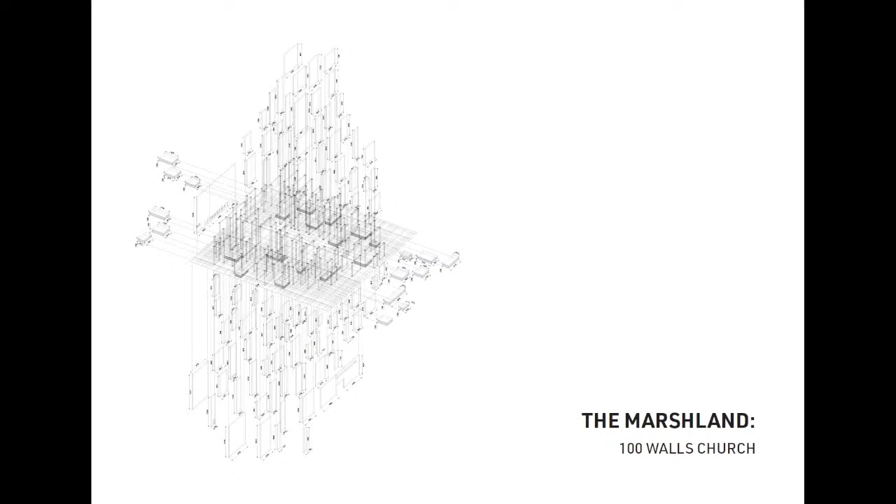And we were asked by the clients to design a church in a relatively weird condition. This church was going to be in a mall. And that might be very strange, but we got to know that religion is a very integral part of culture in the Philippines. So finding chapels or churches in malls is not that uncommon.

Our situation was that it was the first time we were faced with that challenge. So we started looking at the island, and we discovered that it had beautiful mangroves, obviously the trading, but also amazing beaches, very protected actually, and also the famous cross that the Portuguese conqueror Magallanes left. So with all these factors, we went a bit deeper and started to look at the site itself.

Our site was in a marshland, in a piece of reclaimed land that was relatively close to the Cebu Historic Center, but also to the Mactan International Airport and other cities of the area. So our site itself was quite empty, but it was not going to be like that for a very long time.

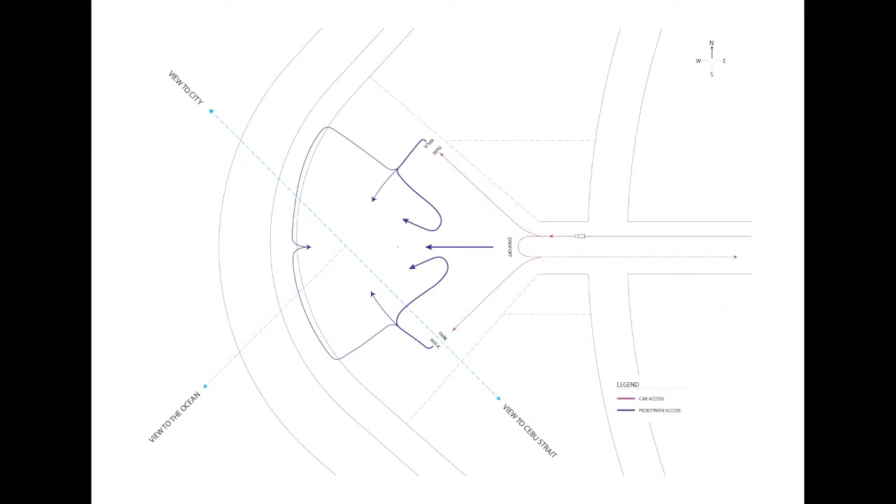They told us a bit about how they wanted the flow of cars and pedestrians. We started to study a bit more the views toward the Cebu Strait, the views towards the historic area, and also towards the ocean. But we didn't have that much to go on, because this was how it looked like. It was very new reclaimed land. And we thought, well, if this church is going to be a

chapel or a church inside a mall, it has to be different. We have to use a different kind of measure. And that's when we decided to take the pew as our unit. And with that pew, we created, or it determined, the grid of the site. And that grid in turn helped us organize the program.

And later on, we decided, well, if we are using that grid and that pew as our unit of measure, why not making it our unit of measure for the structure itself? Why not, instead of the more hierarchical traditional Catholic Church, create a church that is much more democratic, where people can go and wander and get lost? And that's how the walls started to appear.

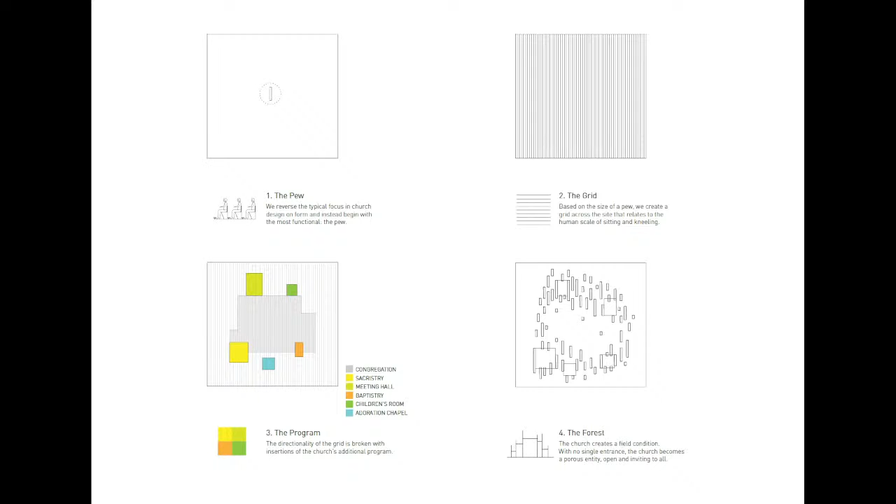It also had, to be fair, a kind of budget constraint reason. We had, I think, $900,000 to design this building that was going to be for more than 1,000 people. It was also going to be...

The timeline was extremely limited. We only had, I think, 7 months from the beginning of the project till it was built, because a Vatican delegation was going to come on a very specific date to consecrate the church. This church is actually not called the 100 Walls Church, it's called San Pedro Calungsod. He's the saint of Cebu. So it had to be that day, it had to open that day, and we couldn't wait.

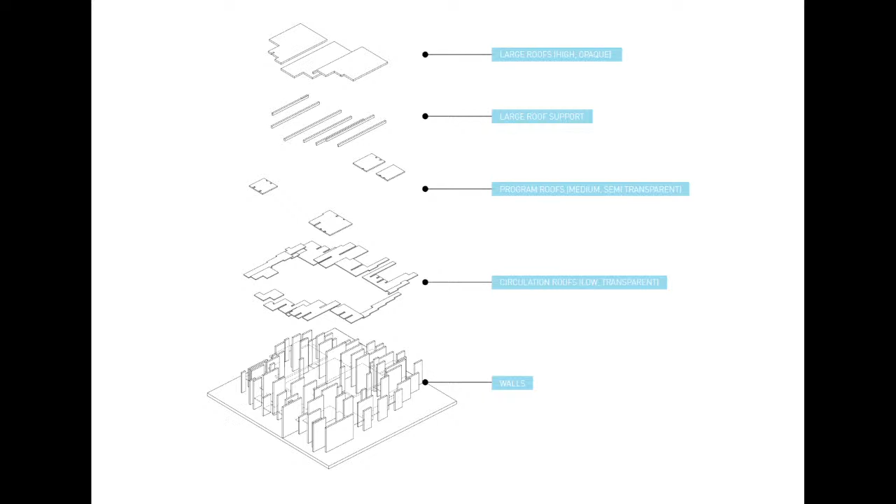So doing the walls in concrete solved two problems. They were structural, but they would also become a kind of enclosure. And they would help us build what we kept referring to as the forest of walls. There would be corners, spaces where people could just get lost and pray without having to go to the congregation hall. Before getting to this scheme, we studied very deeply the Gothic church, the neoclassical church, and saw how those flows work.

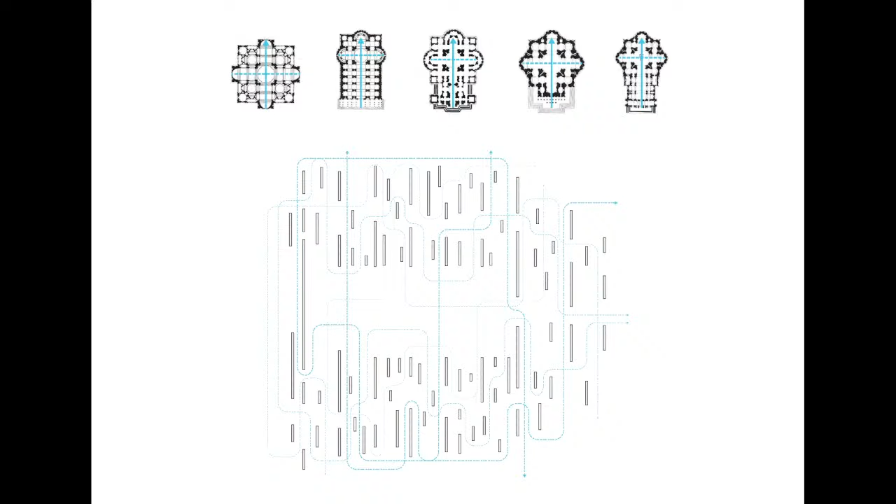But surprisingly, and we actually didn't tell this to the clients, we also got inspiration from mosques, because in the mosque it's a more democratic space where there's not such a division of hierarchy. And we wanted to bring that into this project so that people could wander through and use the public space however they wanted.

So together with that forest of walls and this idea of openness outside the congregation hall, we also wanted to bring the concept of the sunken gardens. The sunken gardens, or the idea of the garden, the orchard, has a deep meaning in the Bible. There are very specific moments in the Bible where the garden plays a very important role. One of the most inspirational for us was actually when Jesus goes to the olive orchard and he has doubts if his destiny is actually dying.

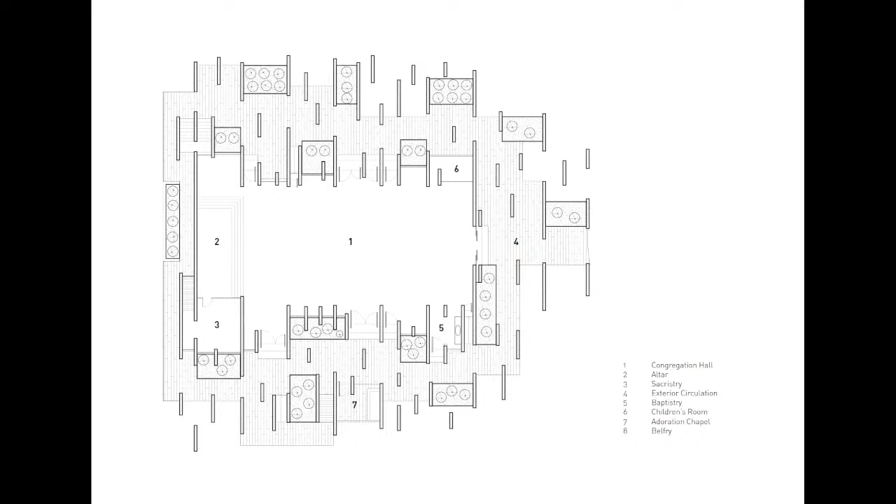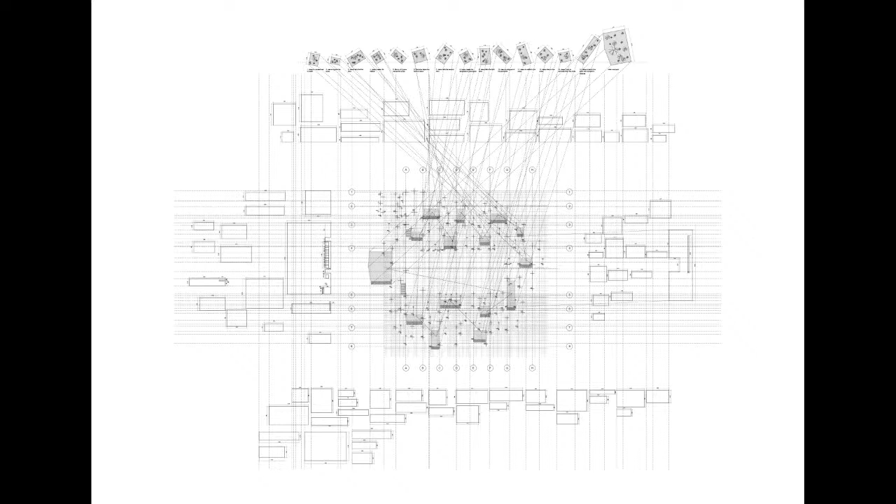So we wanted to bring that self-reflection and connection to spirituality into our building, so people can move around these walls no matter what time of day, even if there's no mass in the congregation hall. Those gardens ended up being paired with passages of the Bible. This drawing looks very complex, but all the gardens are connected to that quote. They follow a specific path or flow, and have a specific relationship with the hierarchy of walls. The walls sometimes go higher in those gardens so people feel more protected and can have a more intimate prayer.

So the building got built, and it was crazy. They ended up doing 24-hour shifts. If you go to Google Street View right now, a lot of it is built. When they consecrated this church, I think a million people went to the celebration, and they extended into all these adjacent lots to listen to the group of priests that came from the Vatican to consecrate this church.

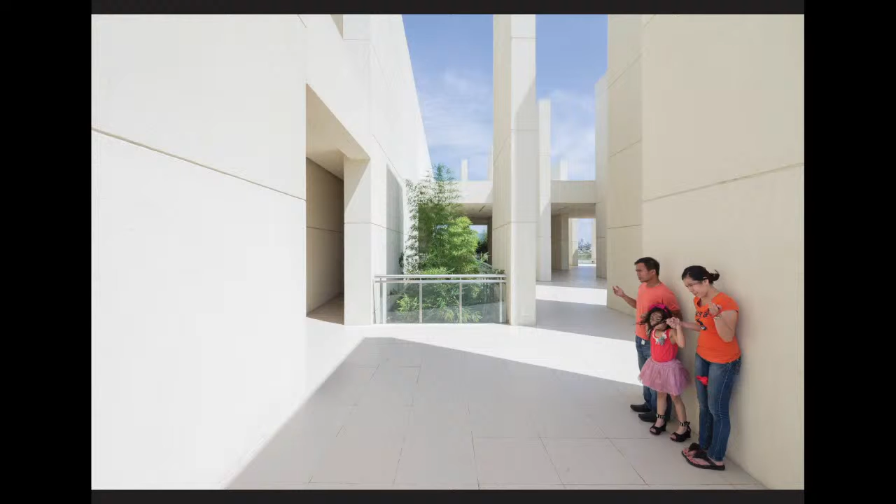We have seen images of families praying outside very often. Sometimes they feel more comfortable doing it outside, or more private, and it works really well for them because they can go there during lunch break if they're working in the mall, things like that. We've been lucky enough that the children's band of the area comes to practice here. They practice outside because they really like the bit more intimacy in these pockets, in this forest of walls.

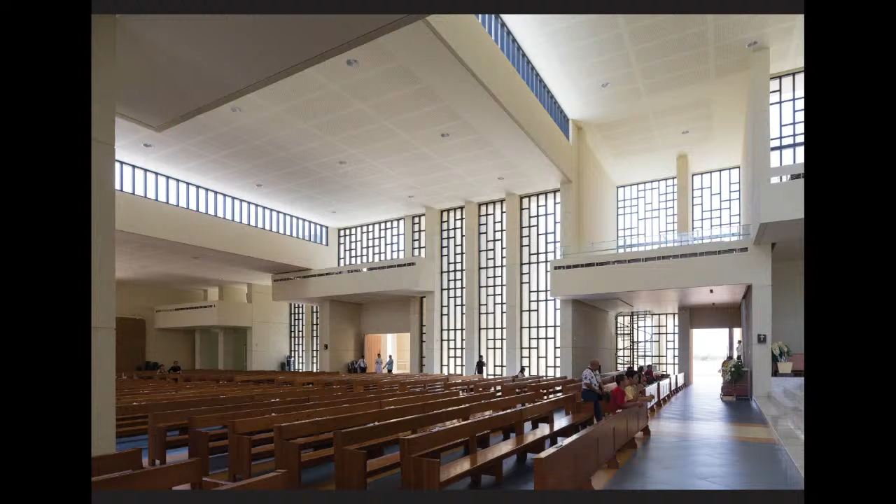This is also the celebration of the Mass, and you can see all those multiple doors that I was mentioning before. Normally they also leave all of them open because it works really well for cross ventilation. We try to have as little use of air conditioning as possible because it's not a rich congregation, so they cannot afford to have the air conditioning running all the time. Again, another factor that influenced the design.

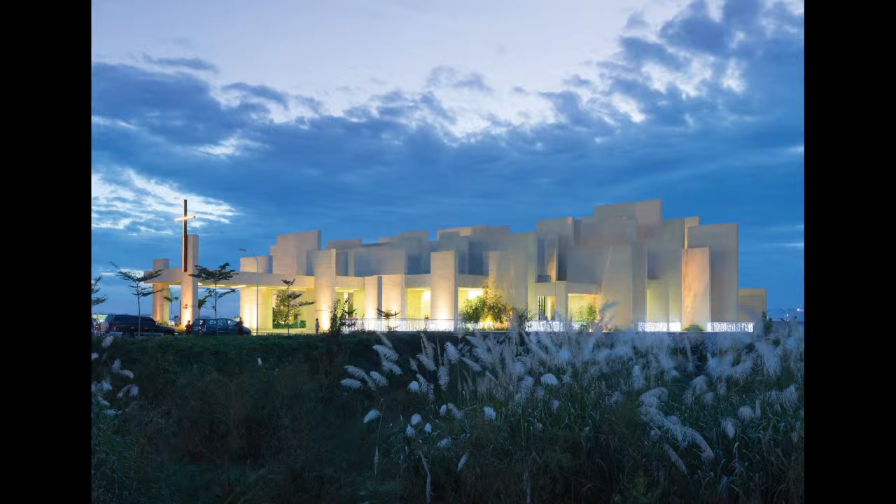Surprisingly, we did this church, and the La Salle Order really liked it and contacted us to do another church, which we didn't expect. This is a different one. I have called it the lake, the Santuario de la Salle, because it's really close to the Taal Lake.

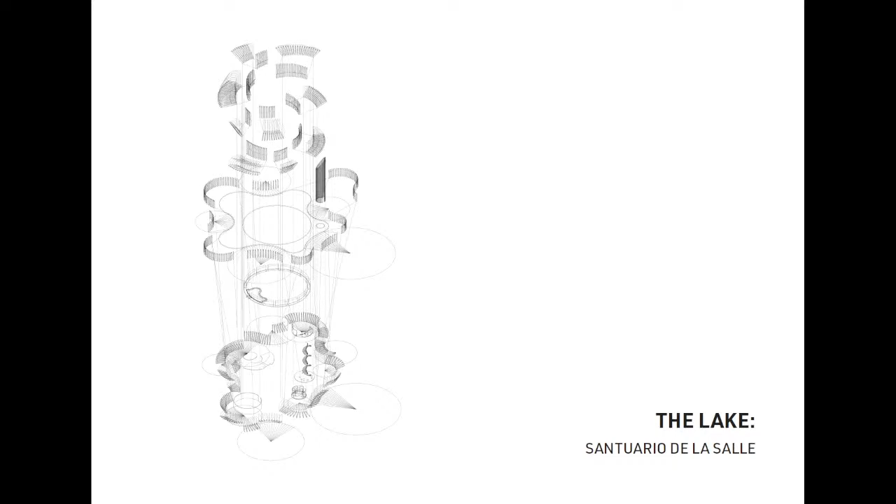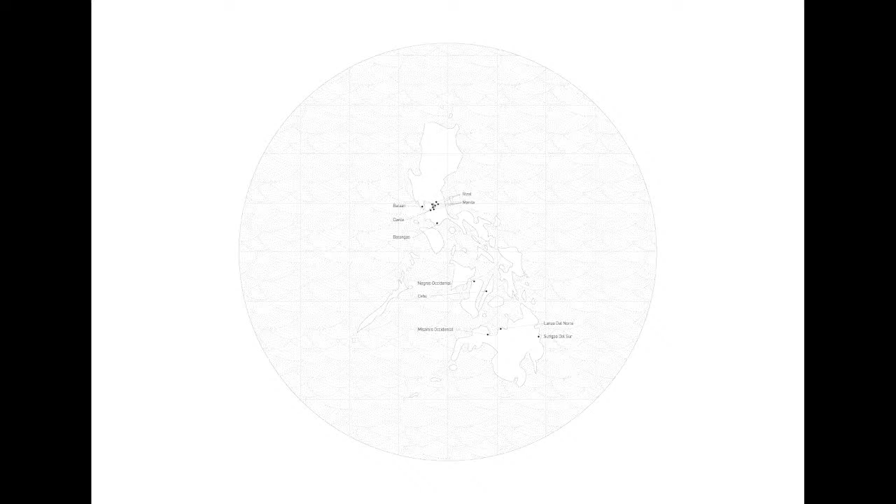The Taal Lake is a very massive crater close to Manila that became a lake as thousands of years passed by, and we were asked by them to do this church. We didn't have much information when they contacted us because this church was going to be in a relatively peculiar location. It was going to be in a campus, but the campus had not been built at all. It was going to be their new technological campus, and the first building they were going to do was basically the church.

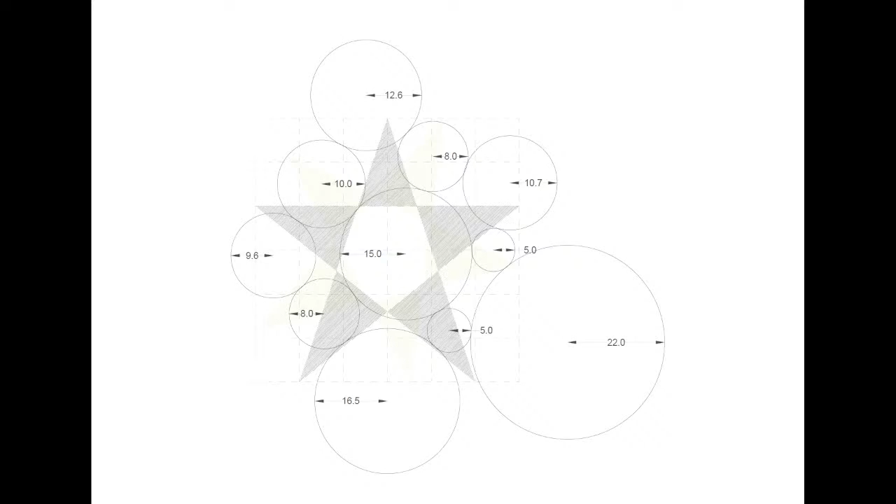So we didn't have even a map at that point, and we said, well, we don't have much to go with, so let's start and look at the star. The star is the symbol of La Salle, and maybe that would help us understand a bit more how we can organize the program.

We started thinking, well, if this is going to be a church for students, it cannot be a place that is super enclosed. It has to be open, it has to be welcoming, because it's going to be used for much more than masses. It's going to be for student groups. Also, sometimes from what we have heard, they meet there as unions. So it's a place that has multiple lives, many more than we expected.

Thinking about this, we felt, well, let's design a space that is kind of amorphous, that doesn't have a very clear axis or orientation, because the client also didn't know if they were going to orient the building that way or rotate it. They didn't know yet because they didn't know how the whole master plan of the campus was going to work. So, inspired by the ambulatory space that you can find in Gothic churches, which is that corridor that goes behind the altar and all around the axis of the church, we took that and we wrapped the congregation hall and introduced program, other kinds of rooms, the baptistry, the adoration chapel.

This is again a very large church. It is for 1,200 people, just the congregation space. So we had to be careful about that. And also, again, we had a very limited budget.

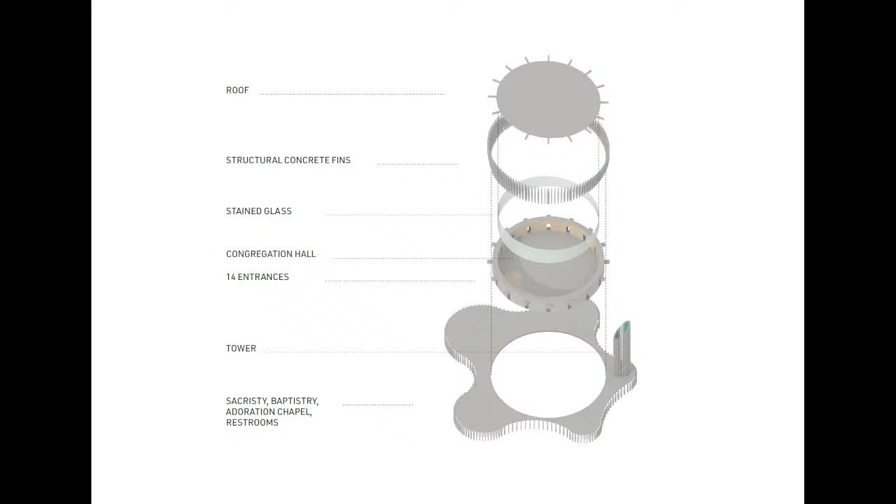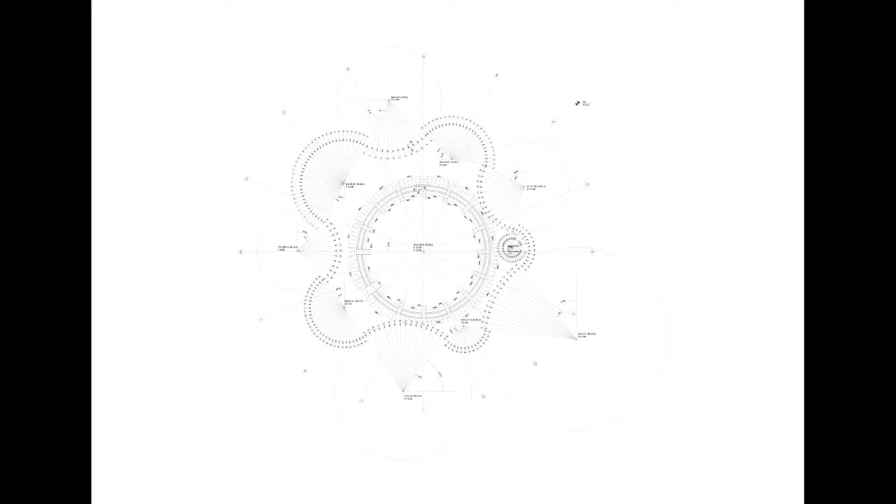And yeah, this is the floor plan. We worked a lot with the radius and the rhythm of the fins to make them big enough for the cranes and the wheelchairs and the thousands of students that will come, but also close enough in certain areas to provide privacy. This building just got built this year. We started in 2014, and it got built 10 years after because it took them a very, very long time to raise the $700,000. It was very difficult for them.

The clients were very excited about the project, and they decided that this church was going to be a pilgrimage church, which means there's now an arm, a relic of Saint La Salle, in the church. That brought a series of constraints into the building—it had to be consecrated before the relic arrived, so we had to finish construction very fast.

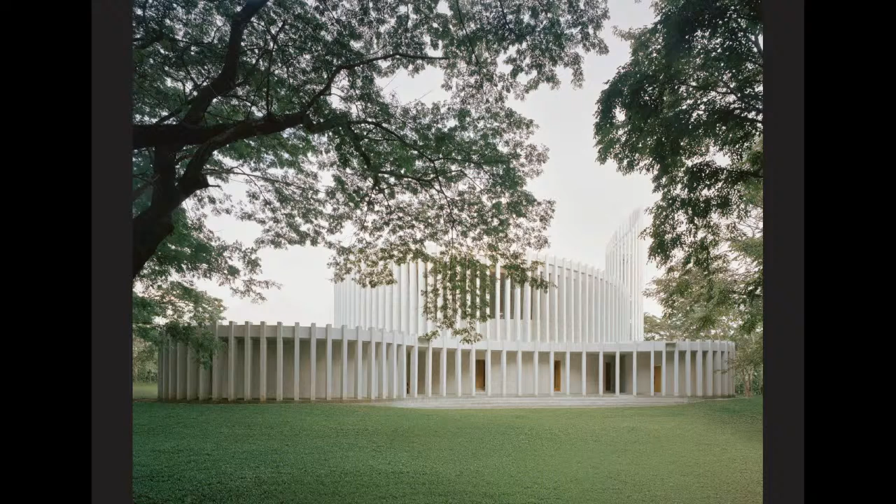We can modify the geometry to accentuate certain aspects, but in the end it's going to be a very simple structure. This is one of the entrances, and that modulation of the rhythm of the fins is more evident here—you can see it's more open towards the congregation hall and more closed towards the sides where we have the sacristy and the adoration chapel.

A view from the corner. We also got a lot of inspiration from the surrounding trees, because at the beginning that was the only thing we knew about the site. The clients didn't give us a site plan or topography map until we started construction. And here's a view of the tower from farther away, from a big access point towards the campus.

Some details of how the structure would work—we were using concrete ring beams to keep the structure very thin but still resilient, because this project also has to be resilient to typhoons, flooding, and, in this case, not earthquakes, but intense typhoons.

And the view from the inside. Right now a lot of students come into this space and just hang out, because it feels a bit more private, but you still have the connection to nature and the forest that surrounds you—so it's more special and more relaxed than other areas of campus.

You can walk all around the surrounding space of the congregation hall, but there are areas that are a bit more tight, and those spaces are like that because they're more private and we want to control the flow of people. That's the access to the bell tower—we designed a spiral staircase that can also be accessed by the public.

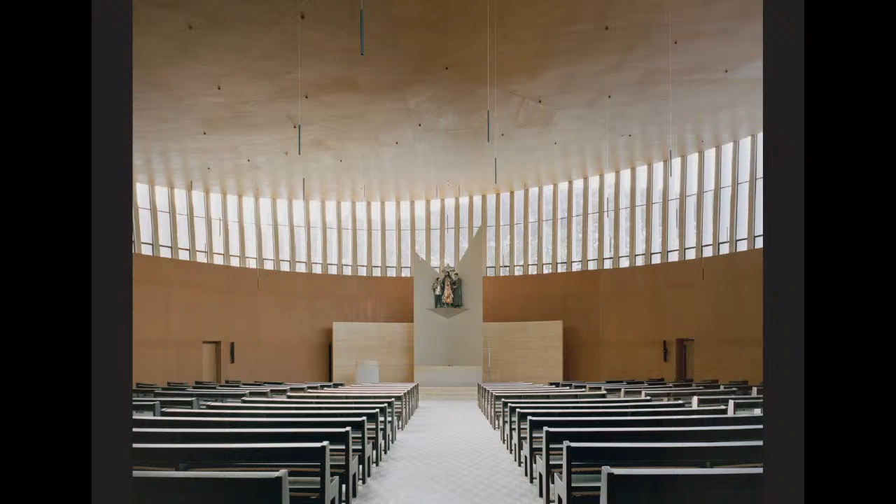Our intention initially was not to use benches. We wanted a space with individual chairs where all the students could move around and not follow this strict organization. But unfortunately, when it became a pilgrimage church, there were a lot of constraints, and this was one of them—we had to use benches instead.

The most delicate materials were also reserved for this space. For the congregation hall, we have wood and marble, so it feels more special, more sacred, and different from the outside—in the end, more unique.

I imagine you've noticed the floor and this crazy pattern we have—this is inspired by the ceramic patterns that the local community makes, always a mix of two colors, black and white or red and white. In this case we did our own interpretation, designed our own tile, and made it in dark green and white. The dark green is because it's the color of La Salle.

And for the sacristy, we use a slightly different color, a pink orange color. This is also a very special private room where the priest meets with students, or now couples that want to get married and things like that. So we also used finishes that were a bit more delicate.

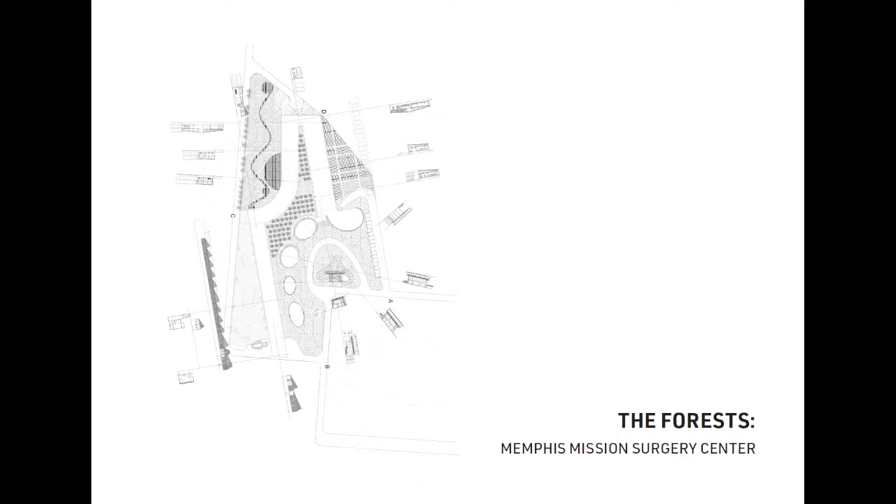So we have done a lot of churches in a way, but we have also done other kinds of projects that had to face the many challenges of climate change I was talking about before. This one I call the forest, the Memphis Mission Surgery Center. It's in an area of the Philippines called Negros, very close to Cebu, the very first project I showed, in central Visayas.

As you can see in the graphics here, there hasn't been much change in life expectancy, but there has been extreme growth in the last decades. Unfortunately, they don't have good healthcare. There are very few hospitals, and also very few schools. So the clients contacted us, two doctors from Houston, although originally from the Philippines, and told us they want to build the first trauma center in Negros, and a project that would be the beginning of a hospital complex.

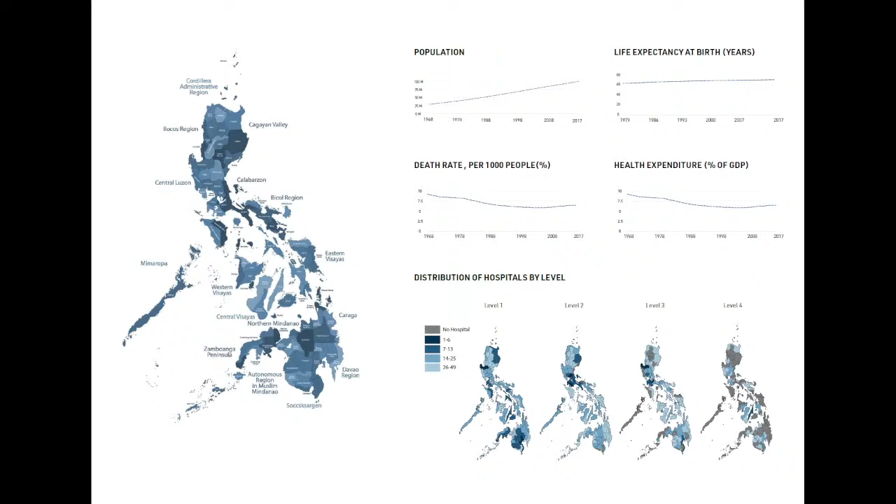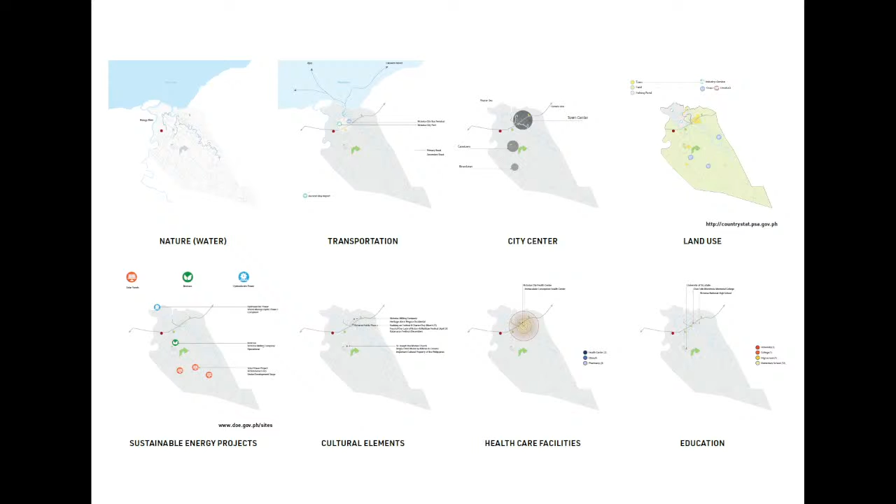They gave us a lot of freedom to design the project, in the sense that we had to follow the constraints of the trauma center, but could include other aspects that would complete the project and were not necessarily connected to healthcare. In order to do that, we had to study the region in depth: the energy, the education level, the proximity to transportation hubs, to cities.

We discovered that this is an area that has been traditionally very agricultural. It still is. They depend a lot on sugarcane and coconut farms. They have beautiful forests, including coconut tree forests, but also other things. They have a lot of industry to manufacture and transform the sugarcane. They have vernacular architecture, and a famous painting called the Angry Christ, an angry Jesus in one of their churches.

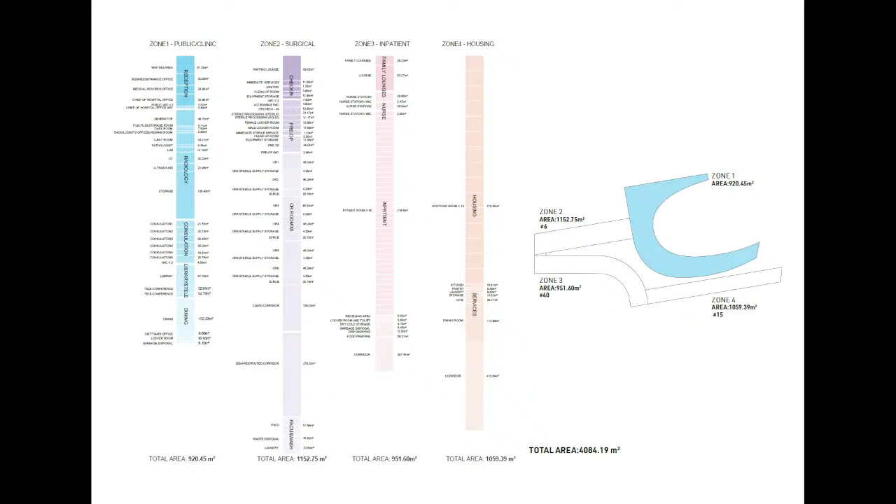So we thought, let's bring the beautiful landscapes of the island and the industrial past and present, and make a project that combines both worlds. That's how we got to the program. Besides being a hospital, we really wanted to give back to the community some kind of education hub, because there's nothing in this area - it's extremely agricultural. And we thought that bringing art would also make a lot of sense.

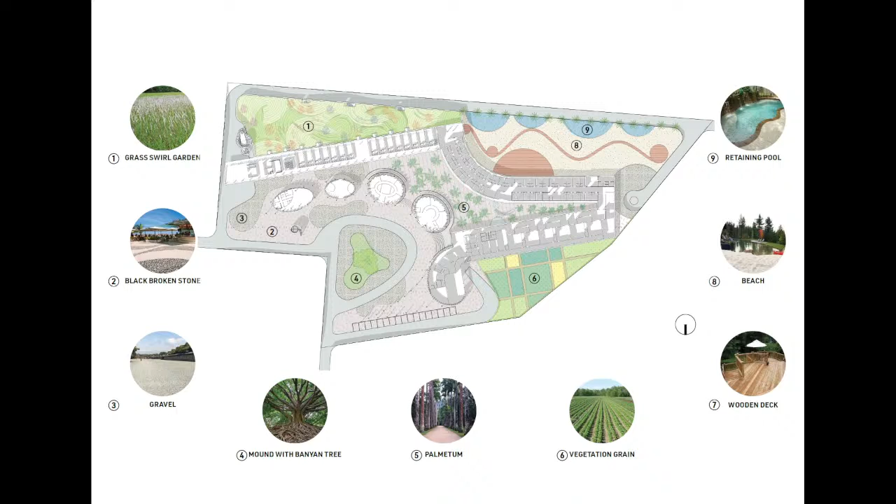So we created this kind of crazy shape with a large public plaza at the entrance, consultation offices - those bubbles around it - residences for doctors on one side, and then the trauma center itself. We surrounded all of this with multiple ecosystems or landscapes found on the island, so the transition would not be as harsh.

So the idea is that this hospital would also attract foreign doctors who would come to provide expertise unknown in the area. They would spend one or two years living here, showing the community and our doctors how they do their work, and that way the community would grow.

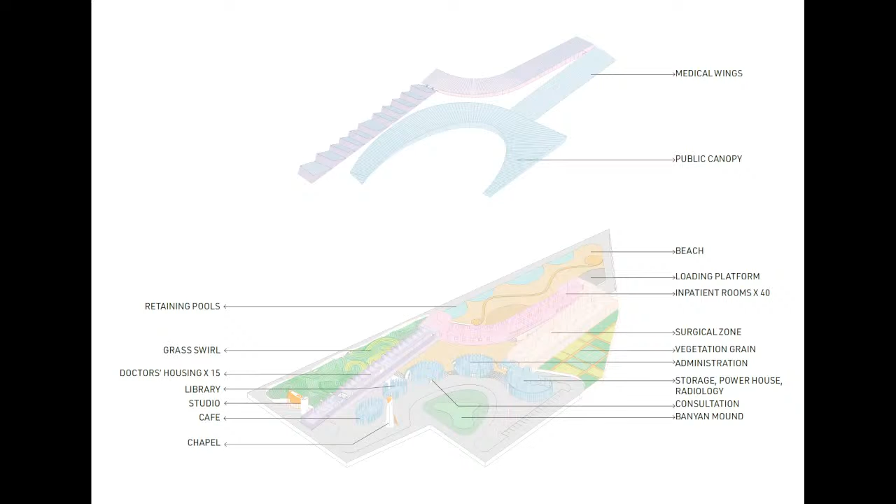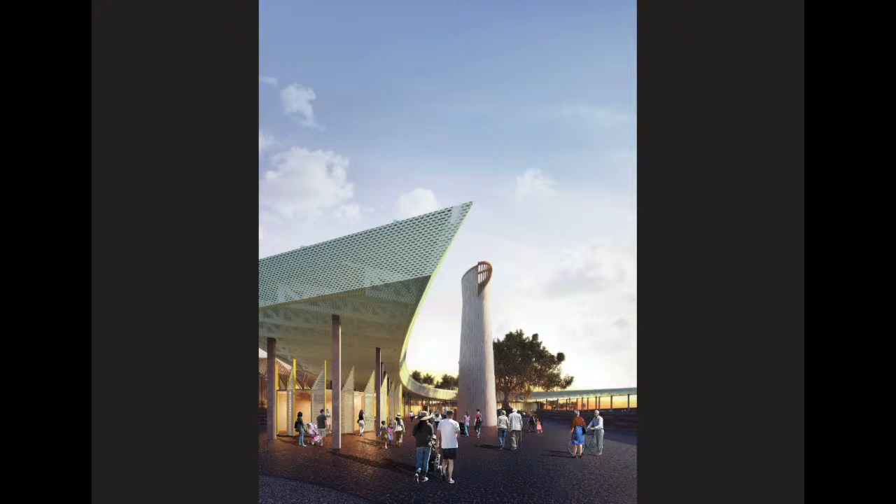This would really be the first phase of a bigger healthcare educational complex. These were all the elements we took into account. We have the chapel, which would not only be for visitors but also for the community - it's much smaller than the churches I showed you before, mostly a space where people can briefly go to meditate or be there if they feel oppressed. We also had the consultation area, which are all those bubbles around the main zone.

We imagine a big staircase that would open to the public, but also it would act as a way of making the entrance to the hospital a bit less traumatic.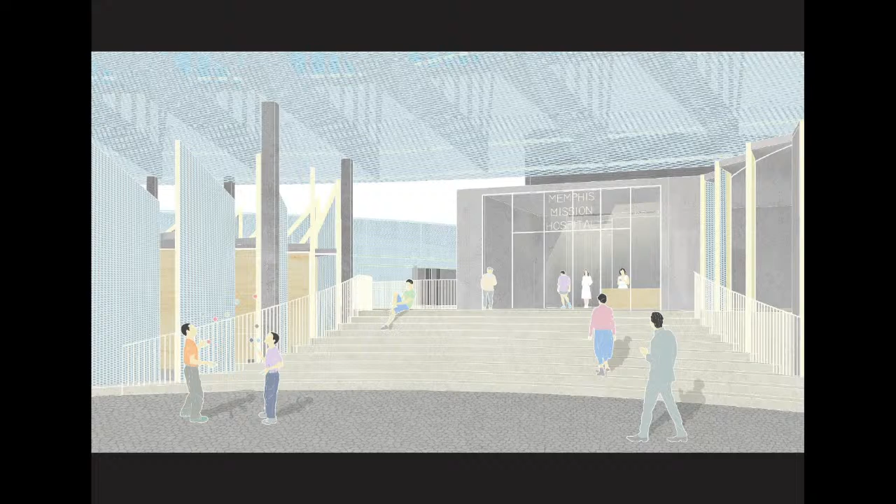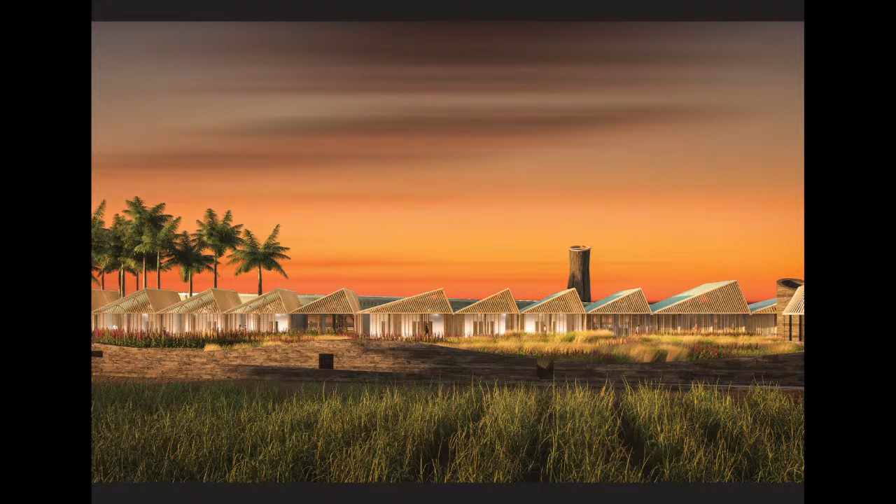We have the medical area. We brought some of those coconut palm trees here too, so it would make the process a bit less traumatic. We had the rooms. There would be 14 patient rooms that would face the sand dunes and the water, which is also a kind of landscape that you can find in Negros. And we try to use light colors for the corridors and more vibrant palettes for the rooms. We have the residencies for the doctors, and again those would face the grasslands of Negros, and they would be more open towards the outside.

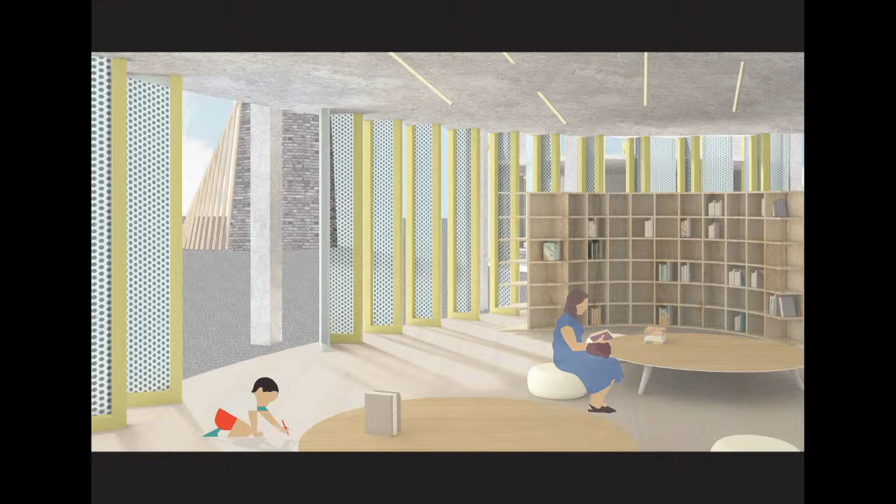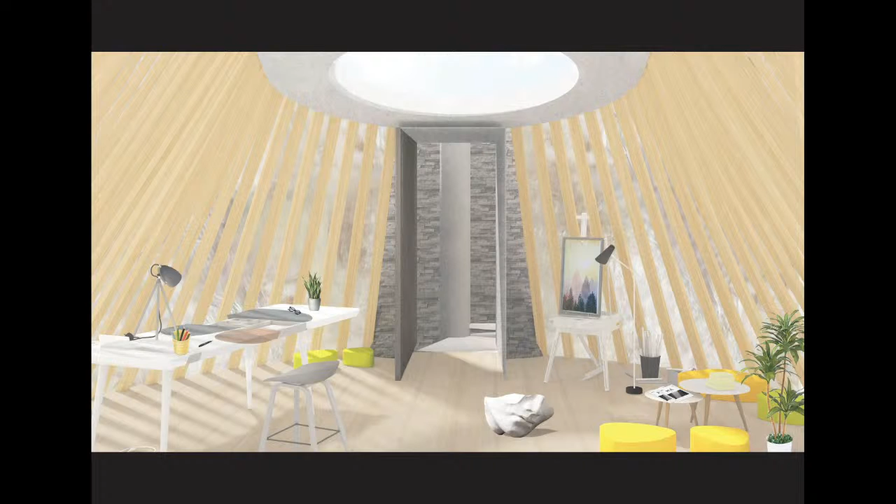So those were, as I would say, a bit more of the traditional program elements, but we included something that we thought the community needed and the clients didn't consider initially, which was a library, so that children and families could come here, a cafe for celebrations or for the relatives of the patients, and an artist studio. The idea is that international and local artists can come here, spend some time, do art with the patients, and also connect with the craftsmen of the island. So a relatively peculiar building with many lives, many elements happening into it.

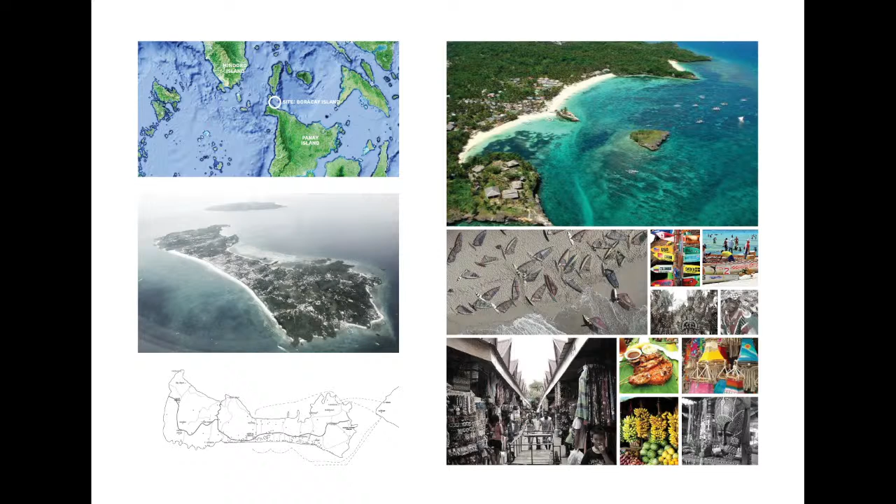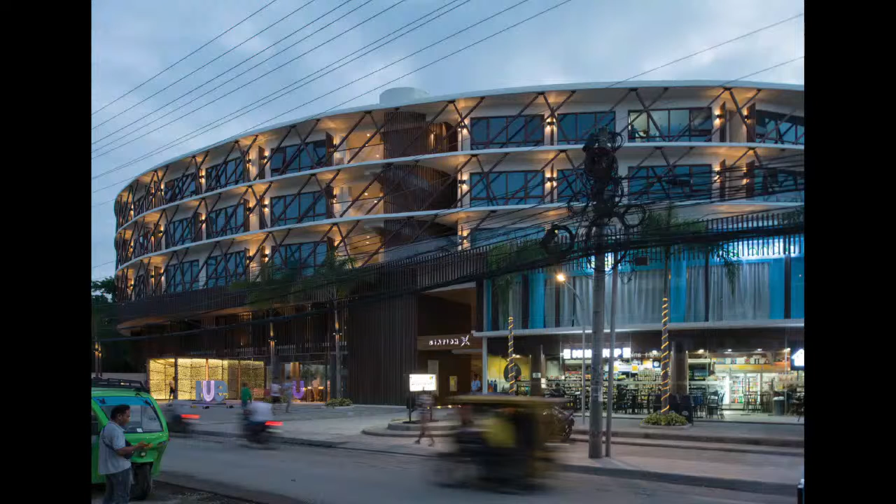And we go from the forests on land to the forest and the water. We did also a boutique hotel in the coral reefs of Boracay. Boracay is a very different location from Negros. This is a very, very touristic island. It's where all the surfers go, and it has a lot of foreign tourism. However, when the clients contacted us, they told us that our site was going to be in the middle of the city.

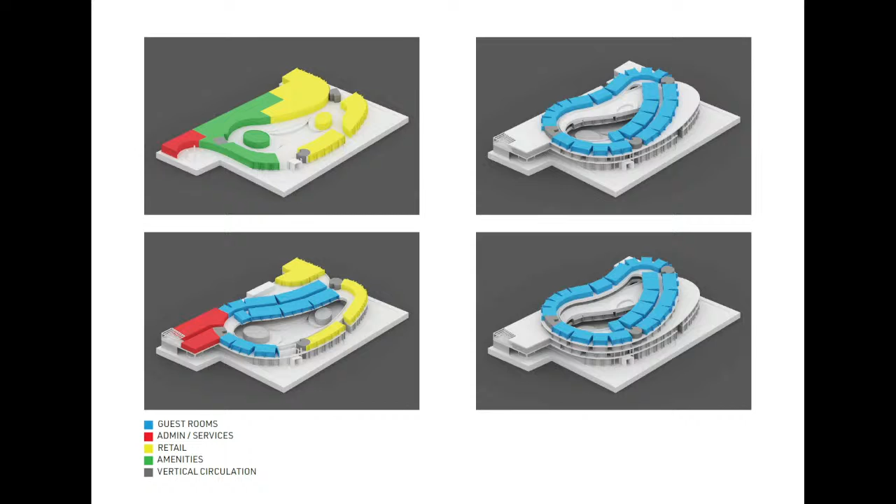We were not going to have any views of the beach. And we thought, well, how can we do a project that's in a beach destination when we don't see the beach? We thought the best way to do this was to create a series of rings around a central courtyard that would not only be for the visitors, but for everyone in the city. This is public, it's open. Everyone that lives in Boracay can enter, whether they stay or not in the building. And that is what made it very successful. It became a quite lively space, even though you cannot really see the beach from those rooms. We tried to bring the city into the project, even though it was not in the traditional resort areas.

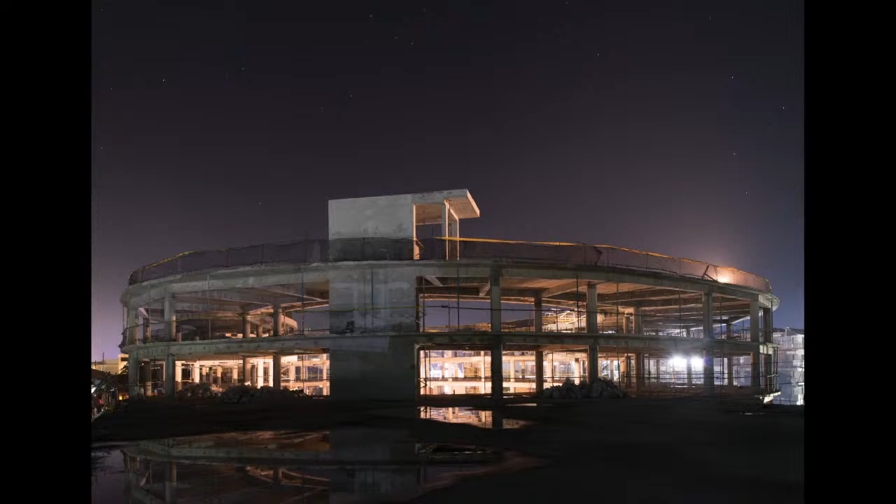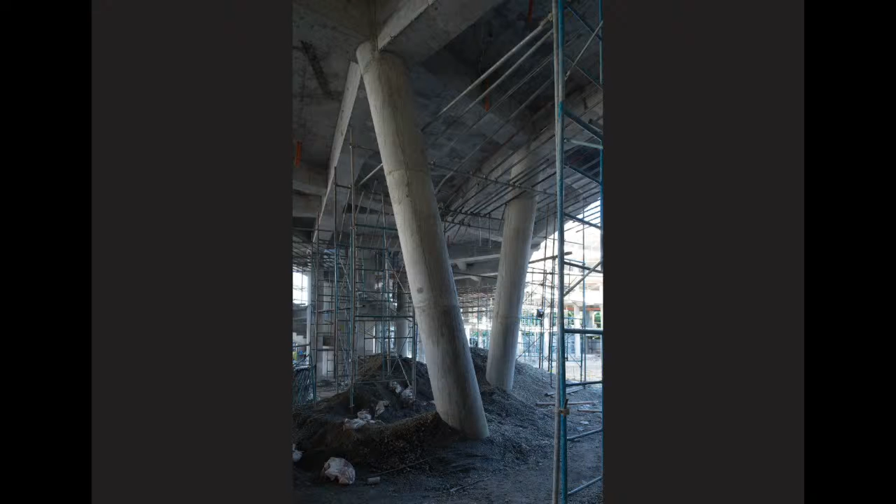I wanted to bring this project too, because it was a project where we found ourselves not as limited with the budget, but limited with the materials. We couldn't do a steel structure here because there cannot be very heavy boats coming to the island, as they would destroy the coral reefs. So we had to do the whole structure in concrete, something we initially didn't consider, and use materials that were on the island or that could be transported in a smaller boat, because otherwise it would not happen. This required a complete redesign and recalculation of the project, but it got built.

And it became a very active place for the community. It has become actually even more popular in the community than for the tourists. The tourists have learned about it by word of mouth, but it's more, in a way, for the locals. We didn't want to do a hotel that would feel very enclosed.

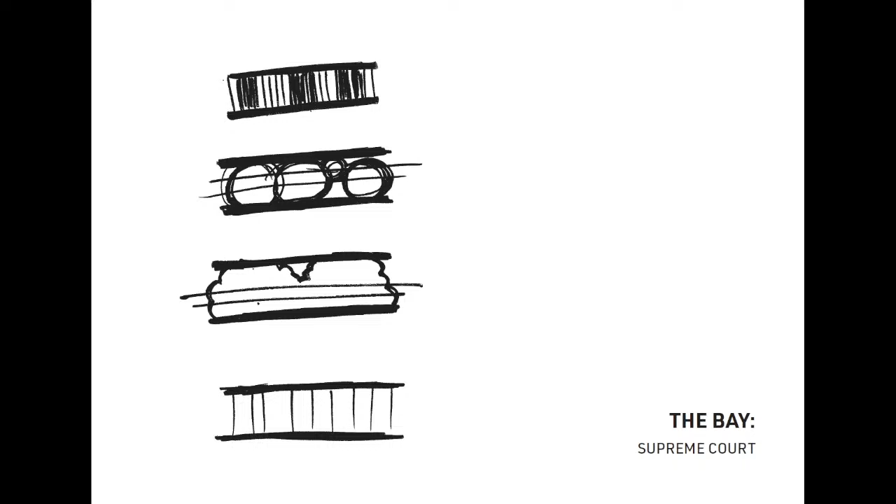And these are the last two projects that I wanted to talk about. Both of them are civic and government projects. One of them was a failure in a way—it never got built. The last one was a success. This first one is the Supreme Court. We were asked to be part of a competition in, I think, 2017 or so. Well, Craig worked on it, so he can talk about it. 2016, I couldn't even remember.

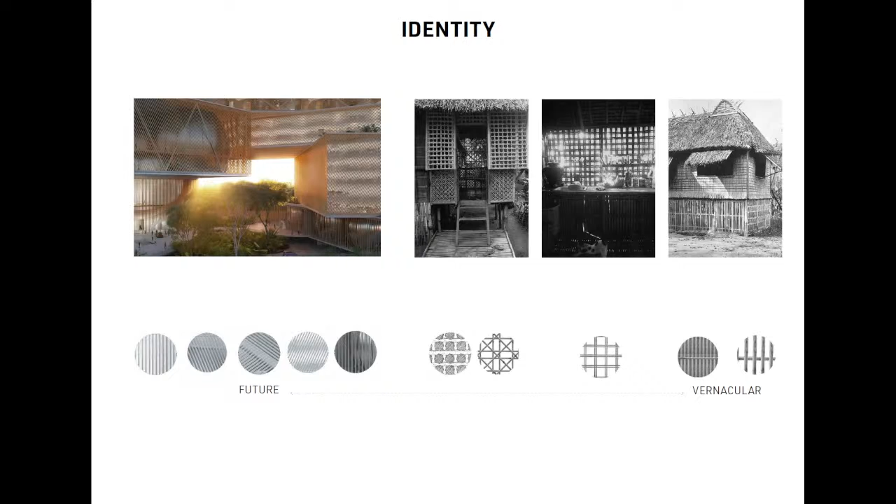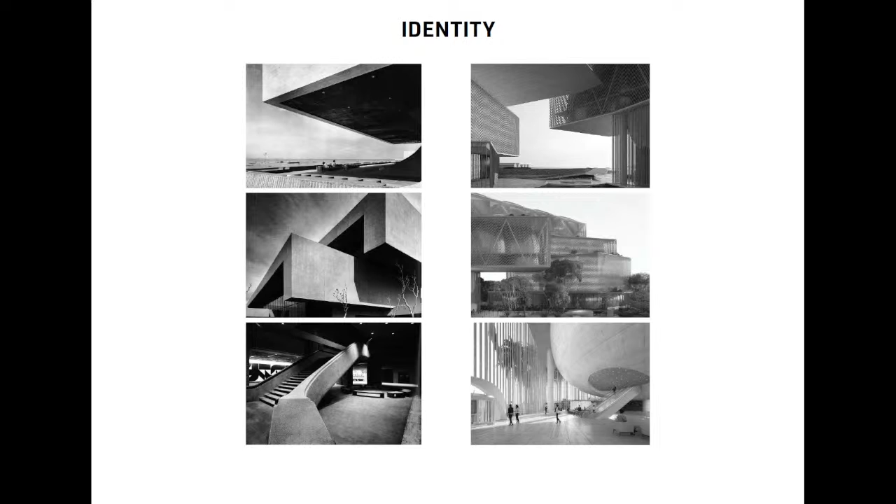We were asked to rethink what a Supreme Court should be for the future of the Philippines. It was a completely different climate then, politically, and they wanted to bring back that movement of the people power movement that had ended Marcos' dictatorship. They wanted to create a building that would represent the solid democracy that the Philippines was at that point. In order to do that, we looked at the vernacular architecture, at the identity of the Philippines. We were inspired by the delicate trellises, the nipa huts of those houses, the bamboo structure, but we were also inspired by the modernist architecture of Leandro Locsin, one of the followers of Le Corbusier in the 50s and 60s in the Philippines. And we decided to combine these two elements to build a project for the future.

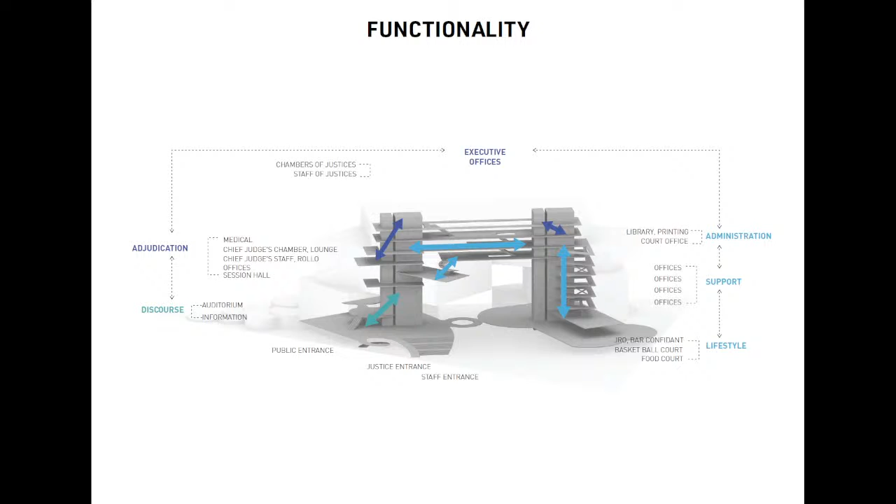We were extremely constrained from a functional point of view. This is a building with high security and very specific guidelines for the function, for the program. So in the end we found ourselves with a series of stacked boxes, but we didn't want these stacked boxes to be just that.

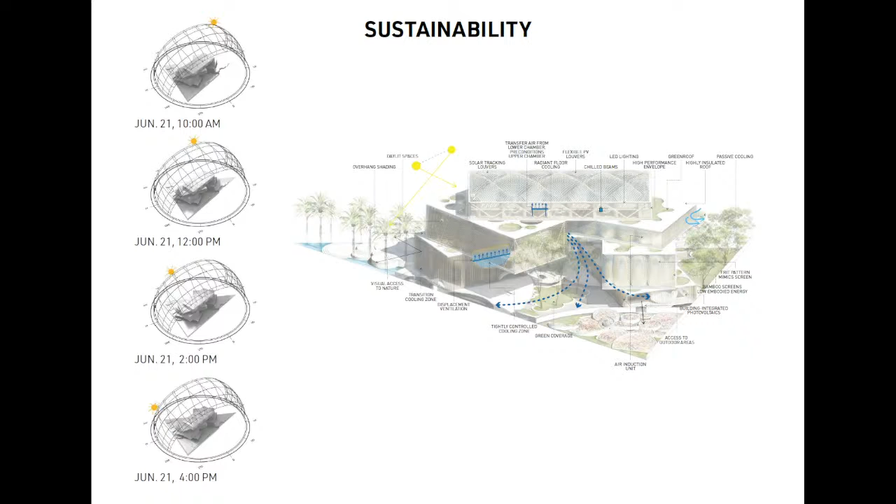We wanted to make a building that would acknowledge the climate challenges we can find now in the Philippines, then and now. We studied together with Arup Engineering the solar radiation, the winds, the water, and realized the best solution was creating a building with a double skin. That double skin will help reduce the use of air conditioning because only those bubbles inside would be conditioned. Everything else would be open to the public and to the elements.

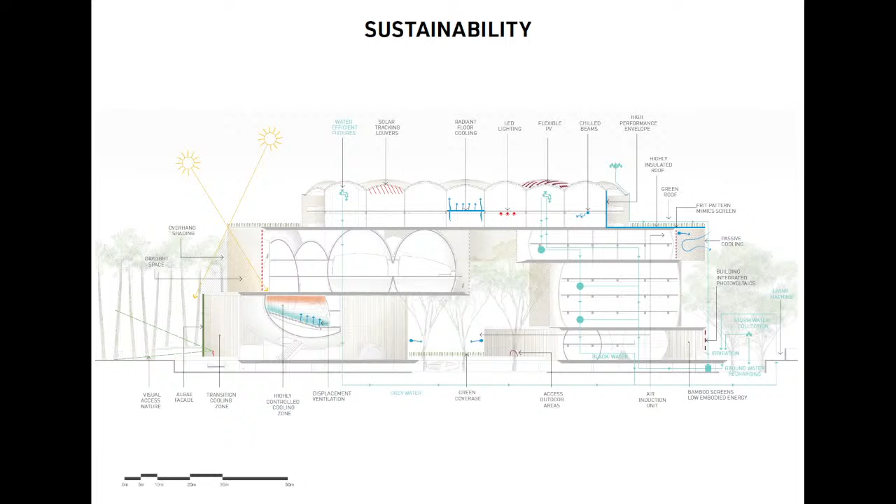It would enhance natural ventilation and create a better connection with the surroundings. Many of these civic government buildings end up being so enclosed and not connected to the population, and we wanted to avoid that.

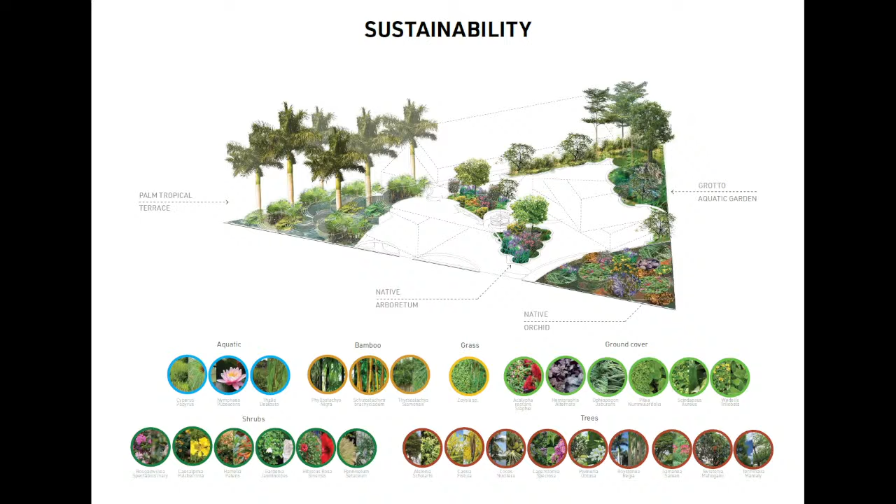We studied the different landscapes in the Philippines and created almost a group of micro gardens or micro landscapes that would represent, as much as we could, the 7,000 islands of the Philippines. That would also help with the conditioning of the spaces. If you surround your building with vegetation, you won't need the air conditioning to be as low, because your body has lower temperature by the time you get into the space.

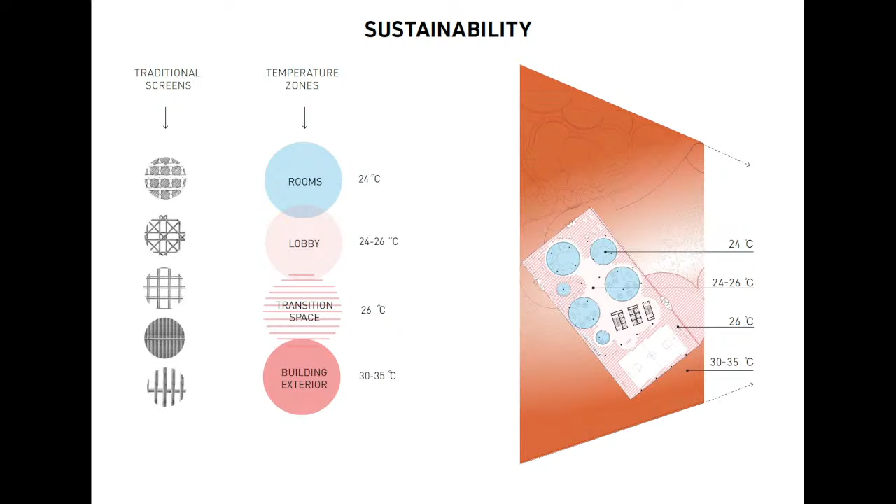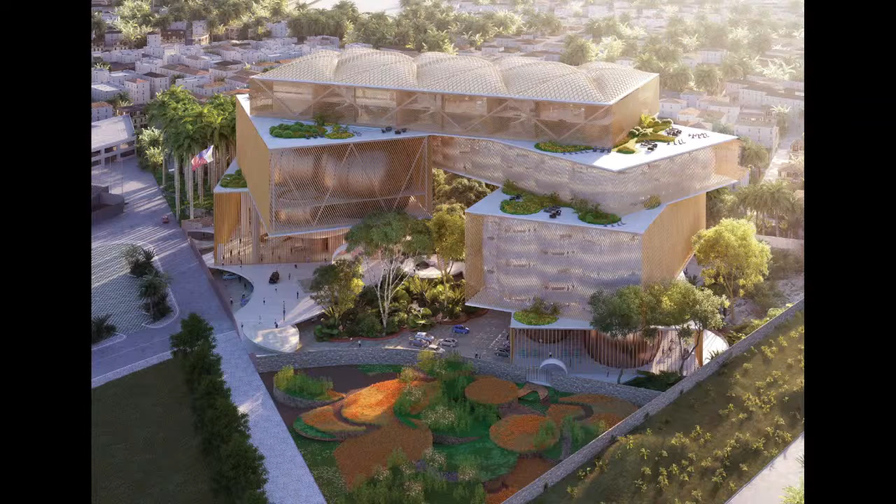So we studied water reuse mechanisms, and we got a building that was a kind of hybrid between the very intense geometries of the brutalist modernist buildings of the 50s, but also the delicacy of the more organic, vernacular architecture. It required a very tight organization of the functions.

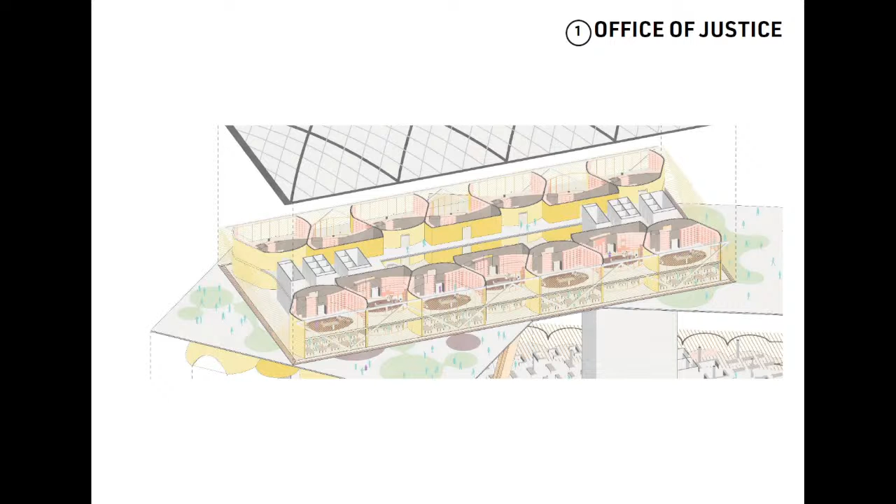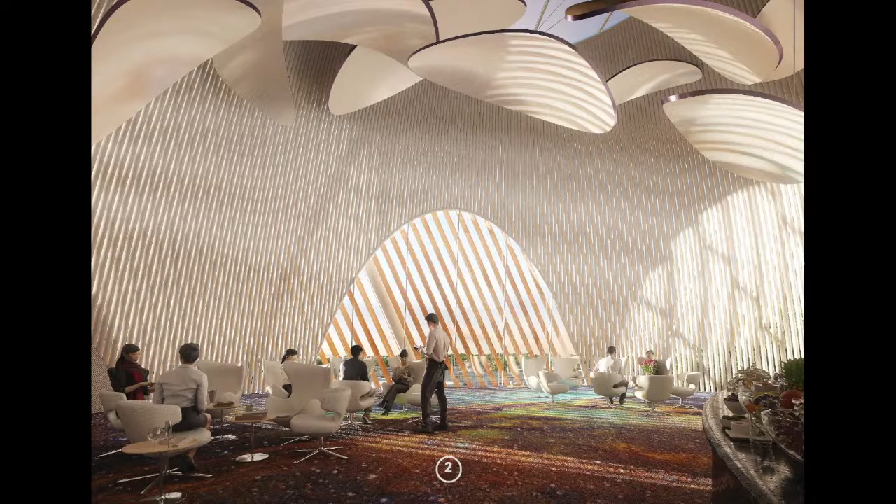I'm not going to go into detail on this because it was very, very limited. We had to follow specifically the square footage, provide renderings and views of every one of them, and they had to be in very specific locations in the building for security reasons.

Even this, and I wanted to bring this rendering because as an anecdote, we had to put the faces of the judges in the rendering. That was required, and those are the faces of the judges.

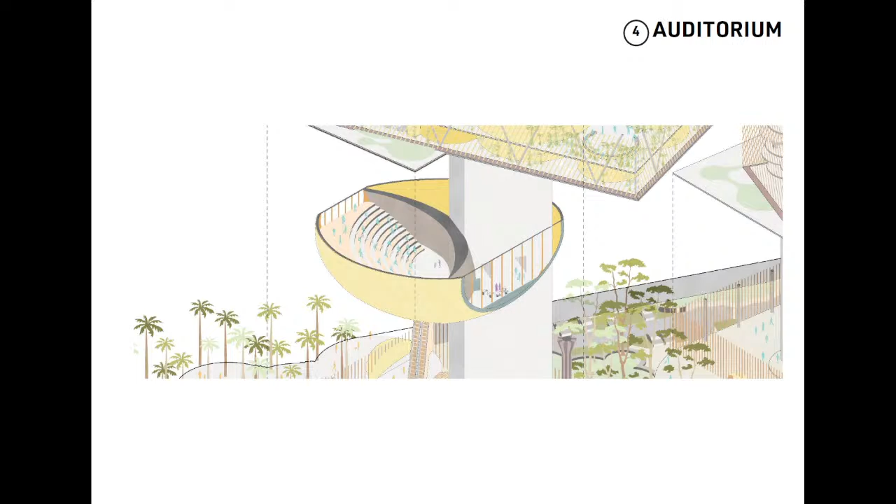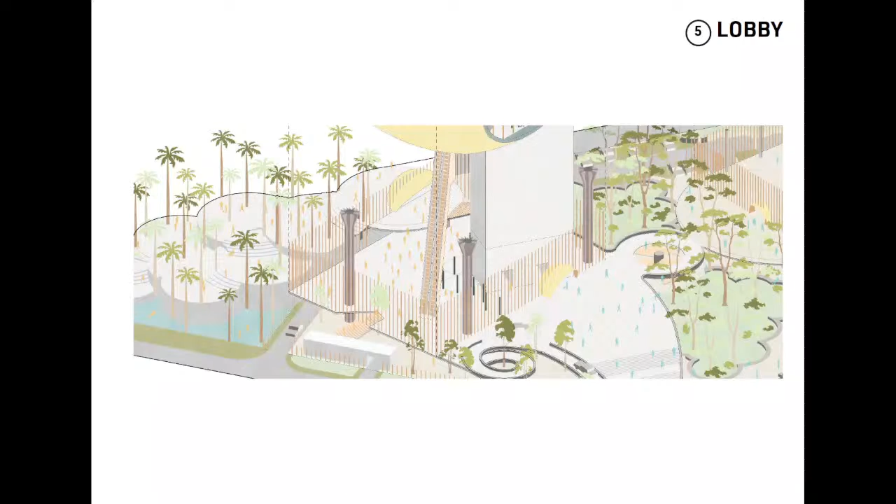Even though this building is not going to be as accessible for the general public as our churches or the hotel, we still wanted to bring people as much as we could to the building. So we lowered the main auditorium all the way to the ground, close to the landscape, right there in the lobby.

You may not be able to access that auditorium, but at least it's more connected to the community. It tries to go back to that idea of the people power demonstration that ended a dictatorship.

This project was a failure because it didn't get built. The political climate changed, Duterte got to power, and nothing happened. Not just us, none of the projects in the competition were chosen, and the Supreme Court didn't get a new building. They are still in the old building they've had, a colonial building, for a very long time, which is a pity because it shows that the Philippines had this very intense push forward that ended with the current situation.

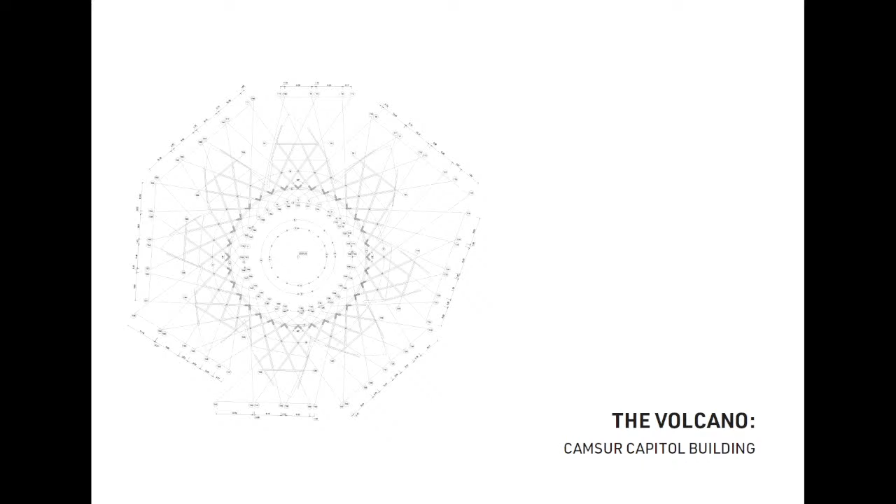But that building influenced the very last one I'm going to talk about, our Camsur Capitol building. Some other governor in the Philippines saw that project and really fell in love with it, and asked us if we could do a government building for him in an area called Camarines Sur. It's also part of Luzon island, but very far south in relation to Manila.

It's a beautiful land with a lot of volcanoes. We are very close to one of them, Mount Isarog, but there are many others in the island. They have in the zone a lot of colorful celebrations, and an economy that's very based on a specific type of crop called the pili nut. It's a kind of pecan, but slightly more shaped like a boat.

We took it as our reference because again we were given a site that was empty, surrounded by rice fields. There was nothing there, and again we didn't get site plans. It seems to be a constant in our office where we don't get topography maps or anything until the very end.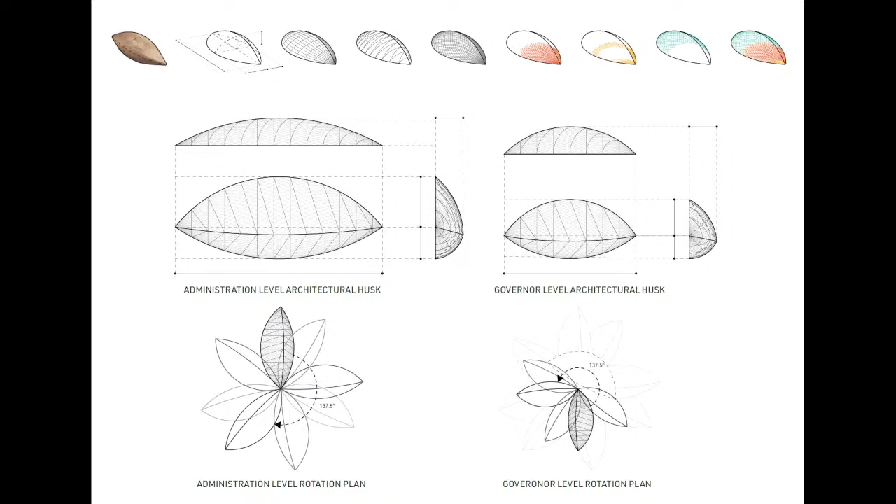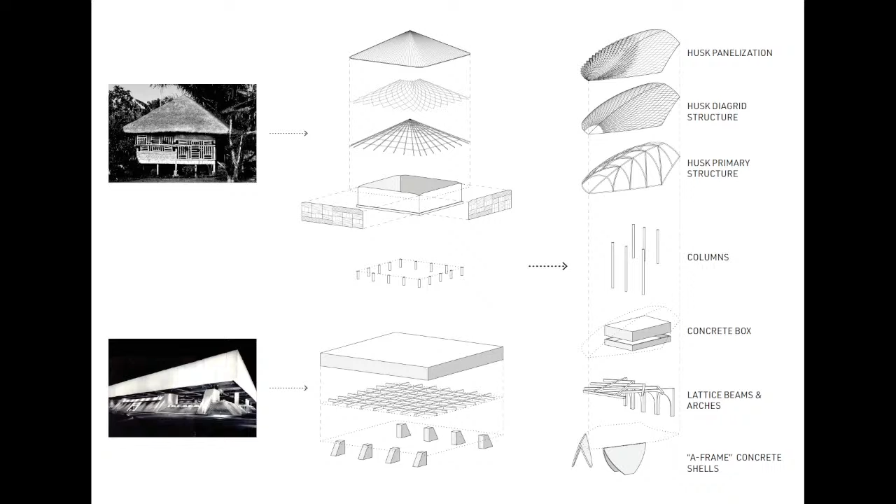And we took that and we thought, well, why not take this shell and generate a building that uses it and stacks it in the same way that they do when they collect it, to create the administration and governor levels. But not only that, we realized that type of geometry could draw inspiration from the vernacular architecture of the island and from the modernist architecture of the past. And we got to this crazy building.

This kind of muscular, almost brutalist podium with a very delicate nipa hut on top.

So besides the administration offices and government offices, we told the client that we couldn't do a government building that was not a crisis center. We were so close to the volcano that this building needed to have the functions of triage, flooding shelter, earthquake shelter, and typhoon shelter, because all those are possible risks in the area.

So all of that happened in the podium, in the basement of the project. We have a lot of showers, changing rooms, additional generators, everything to have thousands of people when one of these crises happen. On top of that, we have a public podium for big celebrations, concerts, campaigns, and then the offices, in a more traditional organization.

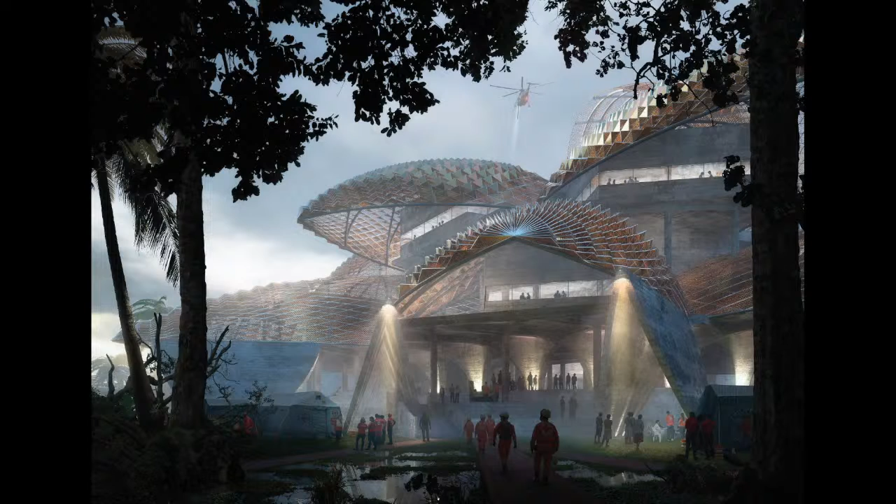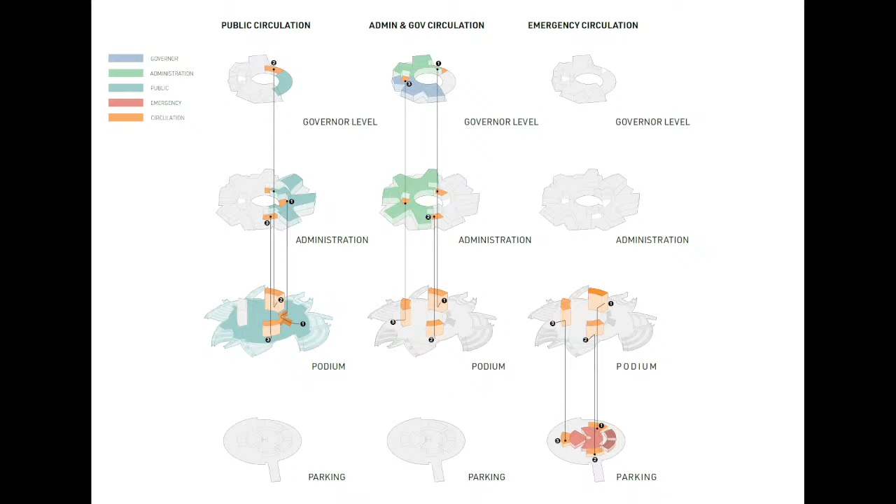That's how it would look like in case there's an emergency, hopefully in a very long time. We had to study circulation very closely because this was a project with a lot of security constraints and also because of the crisis emergency center. But we always wanted to have that interior atrium open to everyone.

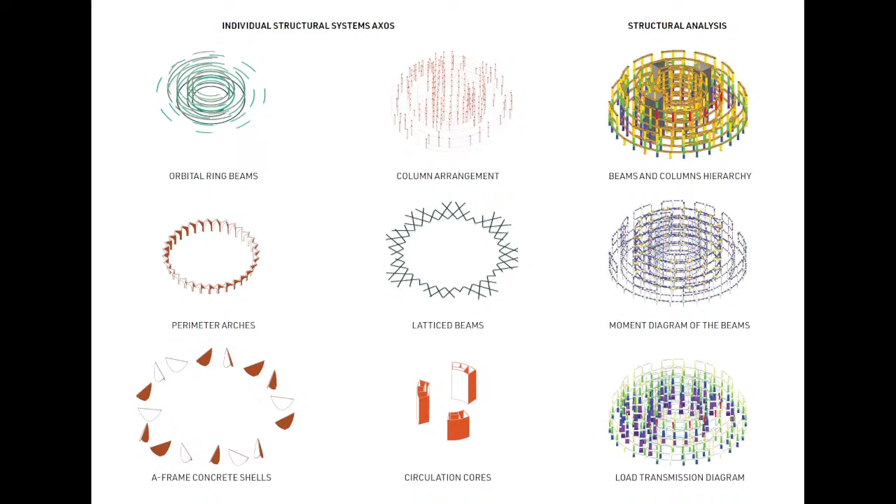We were fortunate again to work with Arup for the engineering. Arup helped us design a very complex system of orbital beams and columns together with those A-shaped frames that we in the office call taco shells, because they work like tacos and they act like the thresholds to enter the building.

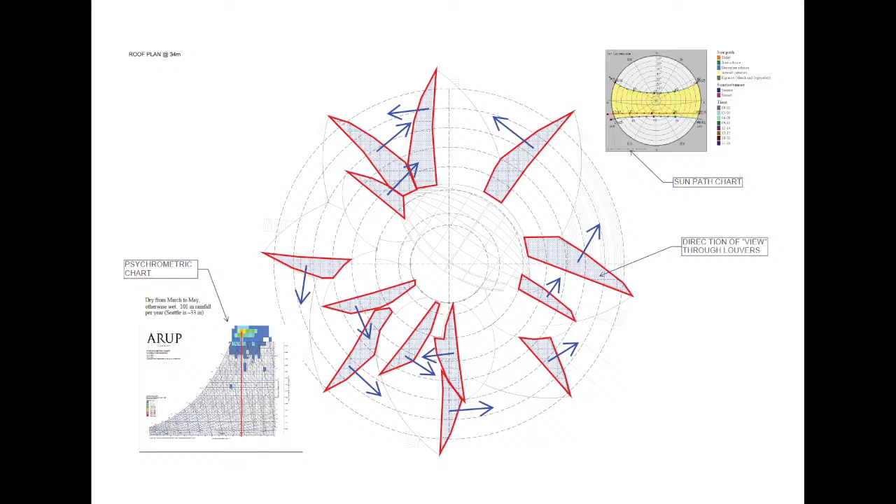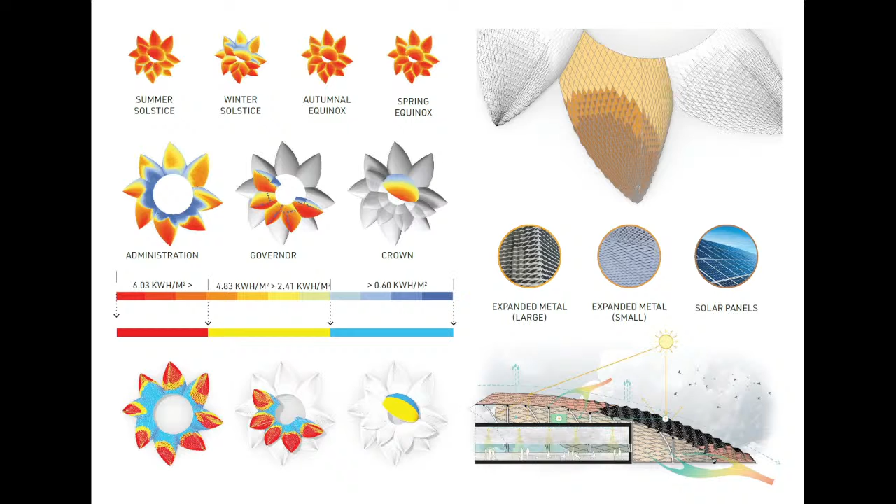These are some diagrams that we generated with Arup. They helped us identify which areas were going to be more influenced by sun radiation, so we could manage that double skin that we had designed in the Supreme Court. We brought it back, but now with a different shape that would allow us to have terraces and public spaces on every level.

And all this in the end was derived from this diagram. This diagram was one of the first things that we did, where we were trying to identify the climate challenges, but also the possible climate solutions. That helped us use as little air conditioning as possible. Only the areas that have color have air conditioning. Everything else that is in white doesn't.

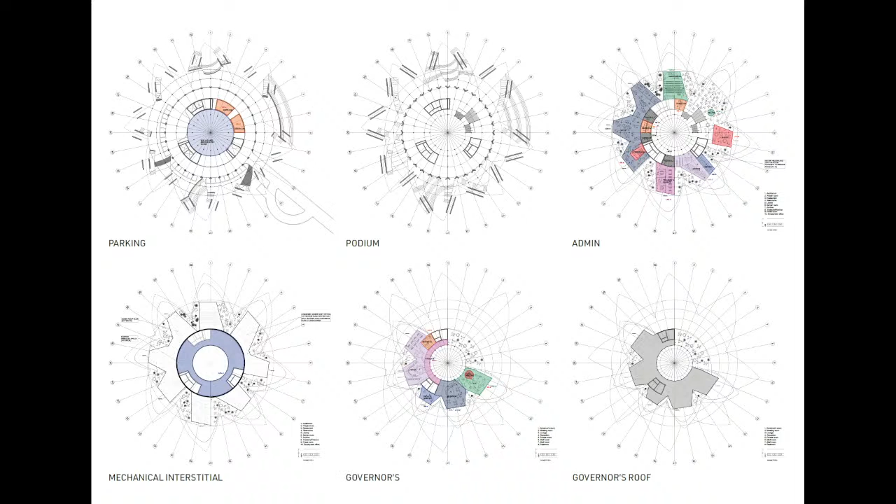I want to show a video because actually this crazy project got built. It's getting built. Oh, I cannot see it. I don't know what it is. No, it's on the other screen, that's why. Here we go, oh my god.

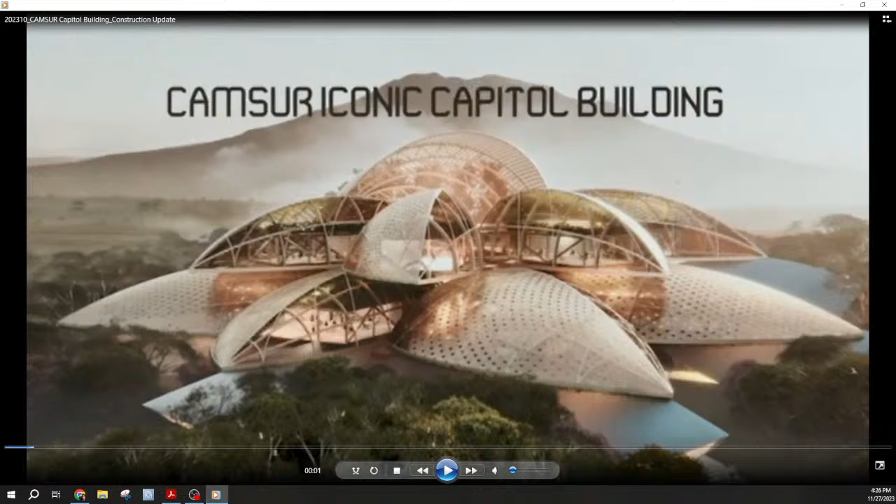I'm sorry for the bad quality of the video. That is the one that the contractors have given us, and this is what it looked like in October.

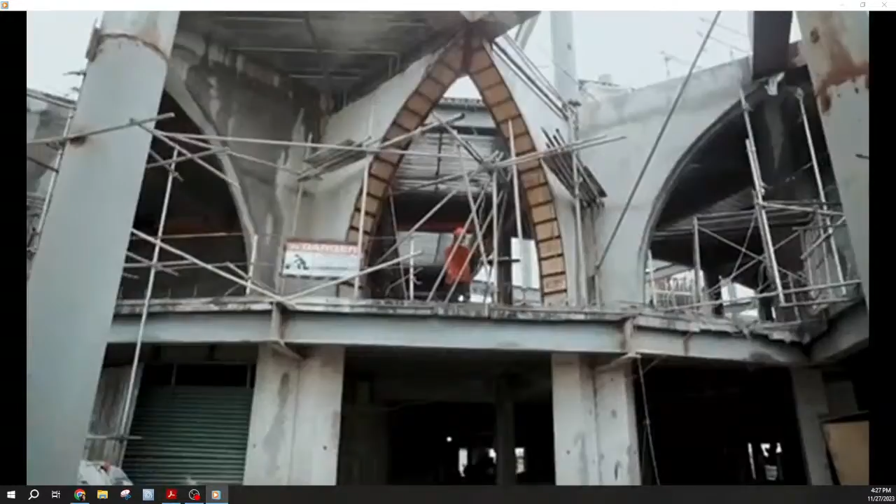It's moving forward. You will see that it's growing almost like a mountain because that's part of the flooding resiliency program. But this is happening. It was very exciting to us to see how they are doing it.

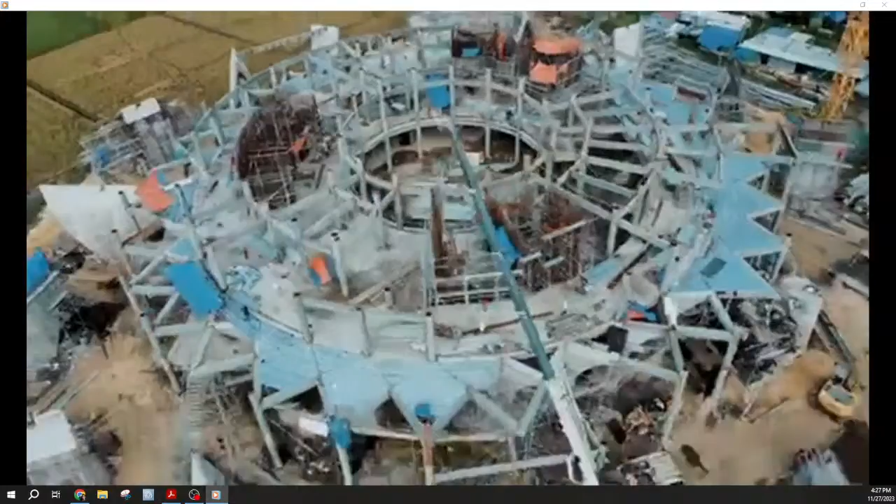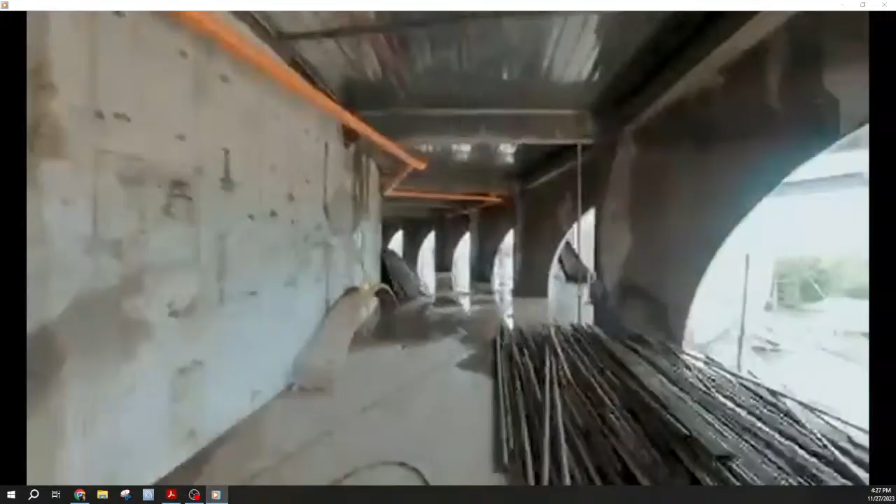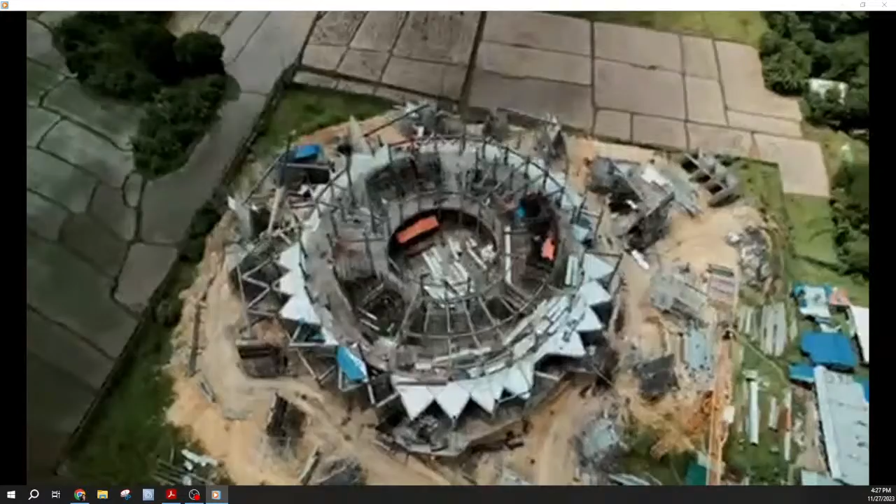We are now with all the concrete structure of the podium up. This is the crisis area, the basement level, where thousands and thousands of people will go if there's another explosion of the volcano, hopefully not, because in the past they have just slept in the rice fields. So yeah, that's it. I hope that it helped.